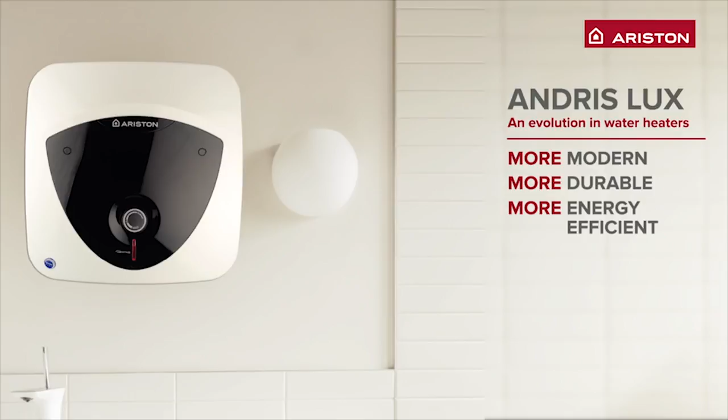The Andris Lux water heaters are of the unvented type, and this means that they are designed to be connected to a mains-fed water supply feeding hot water to one or more outlets. The majority of the range can be installed without a G3 qualification and are powered by a 13 amp outlet. No special taps are required, and the hot water produced is supplied at equal pressure to the mains water supply

to the water heater. The Andris Lux is available in either 10 or 15 litre oversink or undersink models, so it can be housed in a cupboard or at high level. We also offer a 30 litre variant, which is only available as an oversink model.

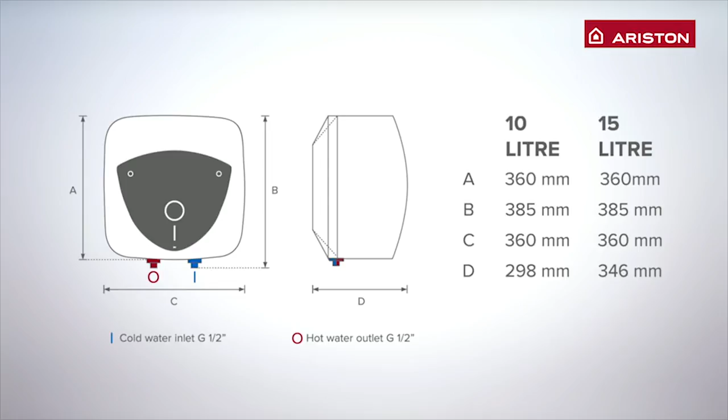The Andris Lux is small and compact, which means you can install it almost anywhere you need hot water. It features faster heat up times, improved performance, and a titanium enamelled tank for durability. We all need small amounts of hot water for washing and cleaning. Loft conversions, cloakrooms, utility rooms, small industrial units, cafes and building sites are just a few places where Ariston's Andris Lux electric water heaters have been installed.

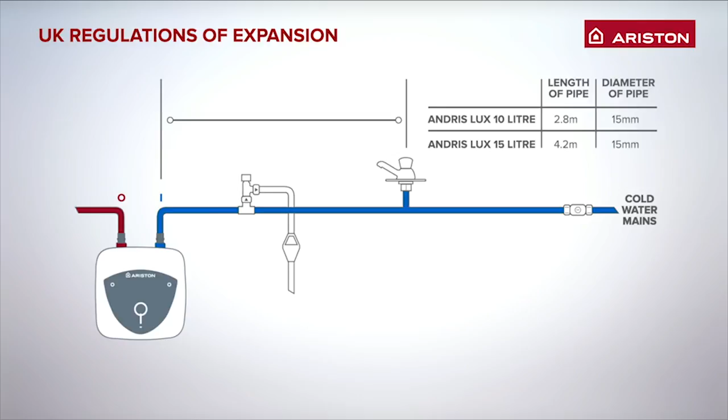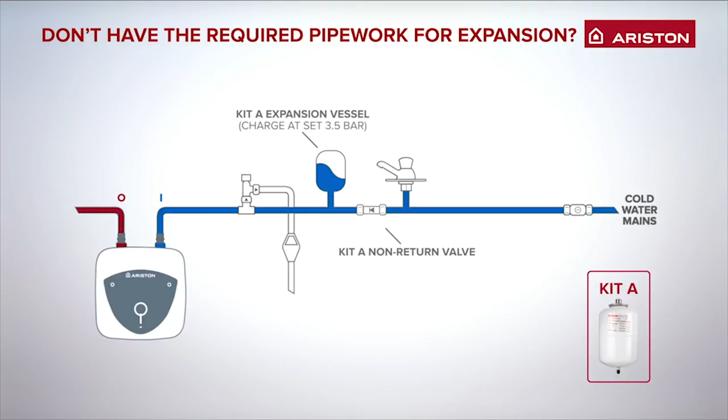So just how simple are they to install? UK regulations currently permit unvented water heaters with a capacity of up to 15 litres to accommodate expansion within the supplied pipework. However, this depends on the proximity of the water heater to the cold water draw-off. If the pipework between the cold water inlet on the heater and the cold tap on the sink is less than 2.8 metres, you will need to install an expansion vessel with a non-return valve, Kit A.

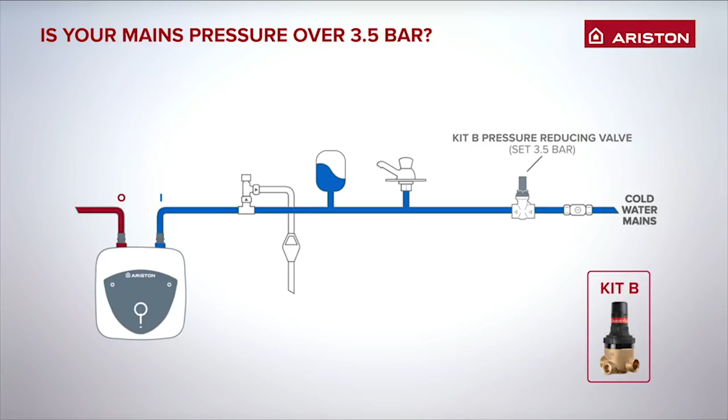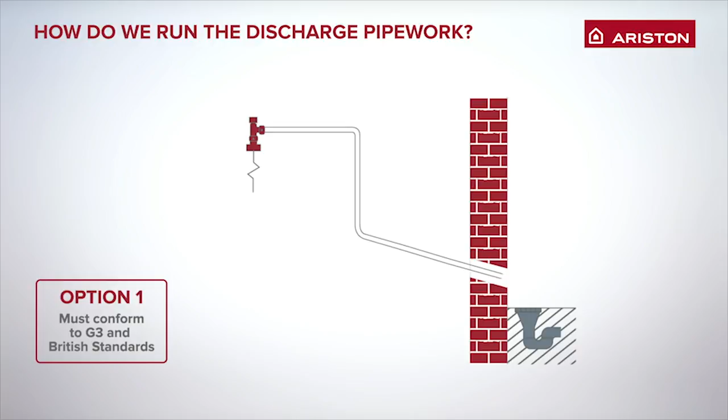If your mains inlet water pressure is more than 3.5 bar, you will need to install a pressure reducing valve, Kit B. If you're unsure about your water pressure, install the pressure reducing valve by default. The discharge pipe must be run through an exterior wall and terminate in a safe place such as a drain. If this is not possible, products do exist to allow you to feed into the house waste system.

If the discharge pipe, which gets rid of excess water pressure, is of an excessive length, you may need to install a tundish, Kit C. If you are unsure, call us and we'll advise you.

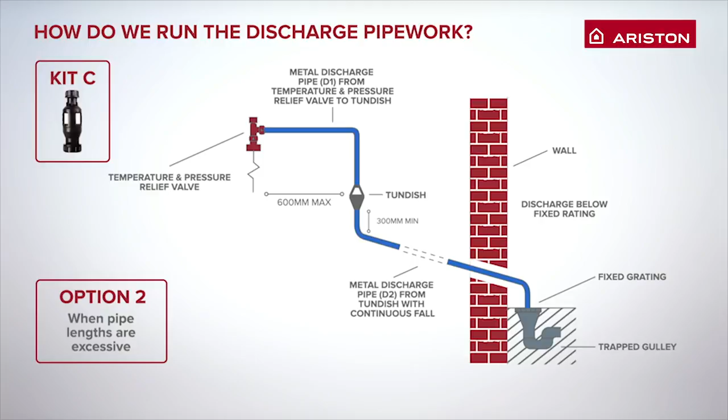First, check you have a convenient mains power and mains water supply. Make sure you've got the right tools for the job. A pencil, a drill, wall plugs, screws and drill bits, 15mm copper pipe cutters, spirit level, screwdriver set, wire cutters, an adjustable spanner and a tape measure.

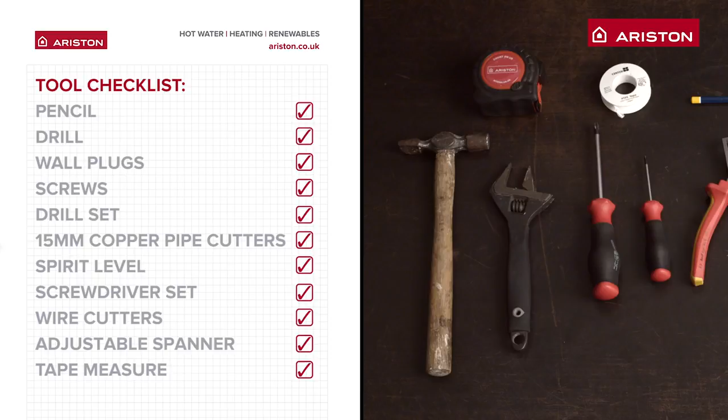Today we're going to install the undersink version to feed a garage sink, and because we only need small amounts of hot water, the 10 litre version is sufficient for our needs. The Andris Lux comes with an installation manual, a pressure relief valve, a mounting bracket and dielectric junctions. We're also going to install kits A and B to show you how they're done. Remember, you need to check which of these kits you'll need for your installation. Before you start, clear the area to give yourself as much room to work as you can.

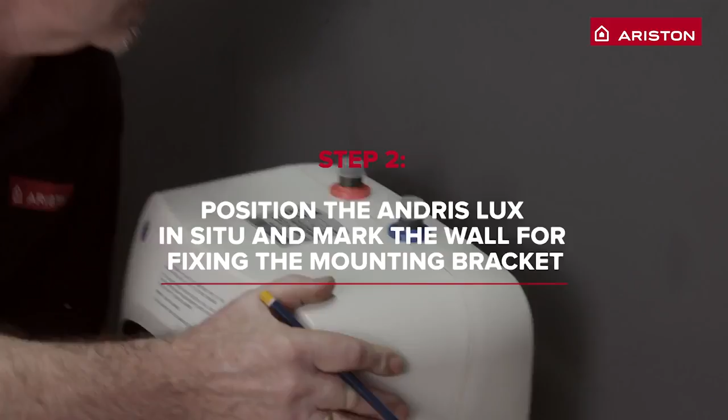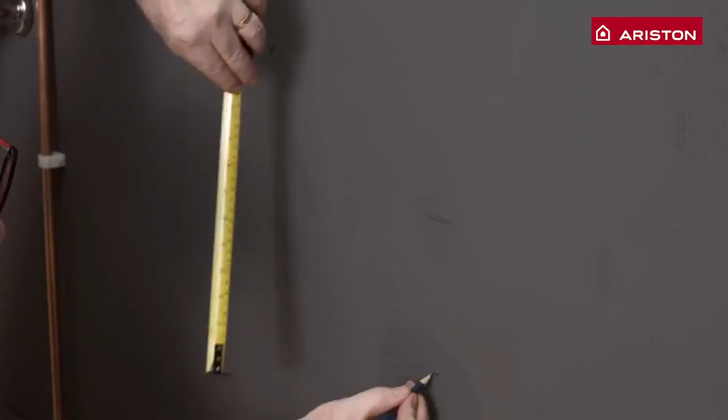First, mount the unit. It's really important to make sure the unit will fit nicely wherever you're planning to install it. Fix the mounting bracket 150mm below the top mark. How you affix the mounting bracket will depend on the material your wall is made of, but in any case, use a spirit level to make sure it's level.

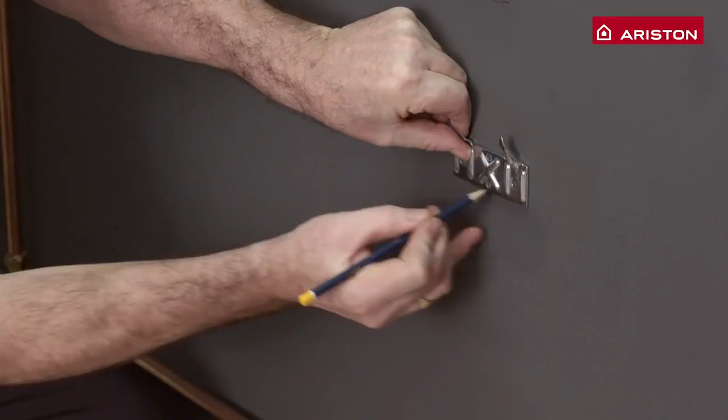Here, Derek is marking the holes ready for drilling, and we'll be using wall plugs and 30mm screws to ensure the mounting bracket is solid. Make holes in the wall using a drill and appropriate drill bit.

Once the mounting bracket is firmly attached, mount the Andris Lux by hooking the mounting bracket into the mount on the back of the unit and firmly push down, making sure it's stable. For this installation video, we're going to use a plastic push-fit system. The system uses a simple action, meaning that it is quick, clean and easy to use.

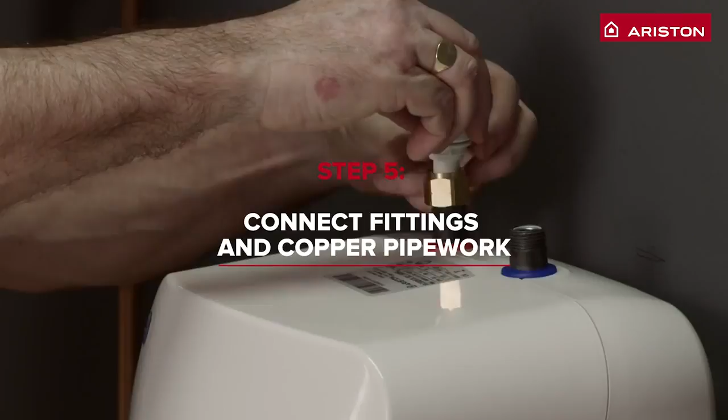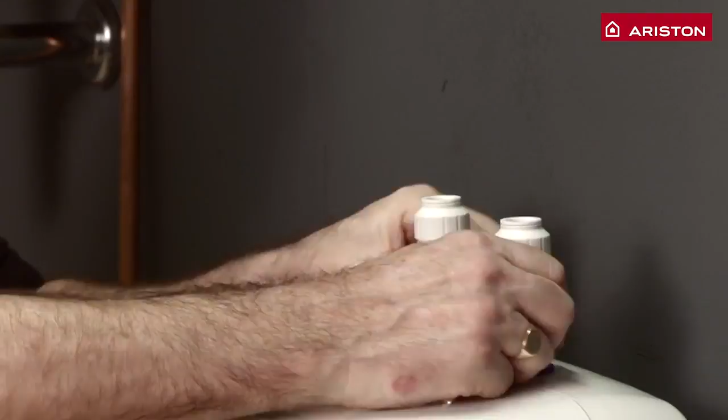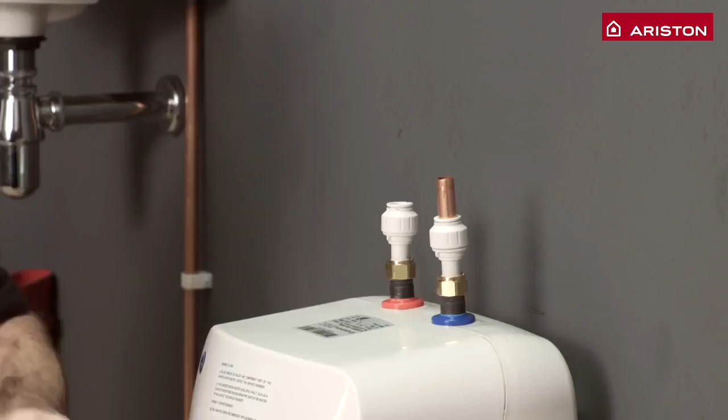Screw on flat face 15mm compression fittings to both the inlet and outlet terminals and tighten using an appropriate spanner. If you're using copper piping throughout, then fit the supplied dielectric junctions instead. To ensure the unit can safely deal with rapid temperature changes, you must have a minimum of 300 mm of copper pipe from the inlet and outlet terminals before going into the plastic pipe. Here we see Derek using a series of fittings to accomplish this.

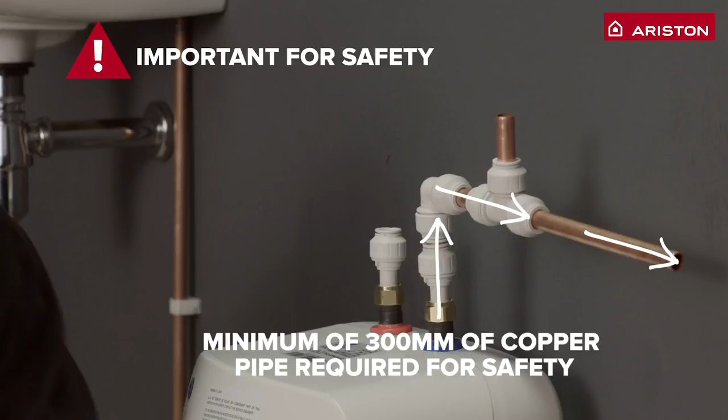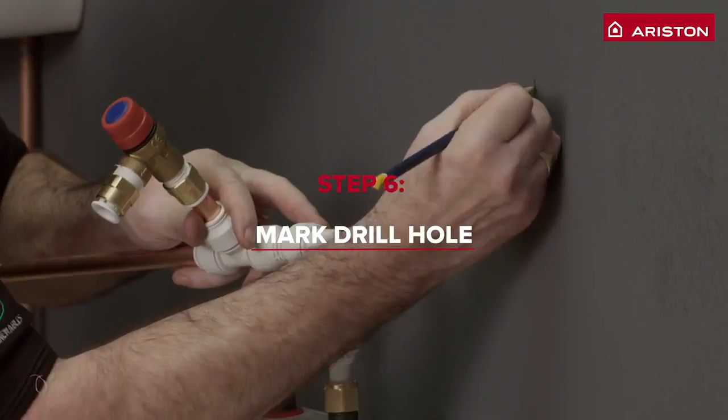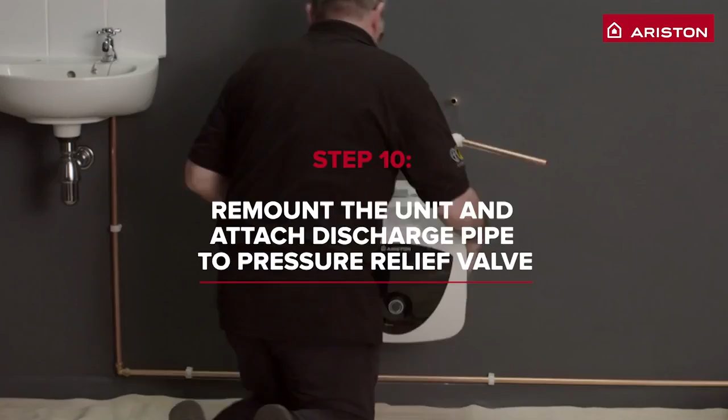He now takes the opportunity to mark out the positioning of the pressure relief valve. Mark the position of the hole for the discharge pipe with a pencil. Now take the Andris Lux off the mount and set it aside. This gives you more space to work and keeps the unit clean. Drill through the wall on the marked hole with an appropriate drill bit. Insert the copper discharge pipe into the hole. Mount the unit back on the wall and connect the discharge pipe to the pressure relief valve.

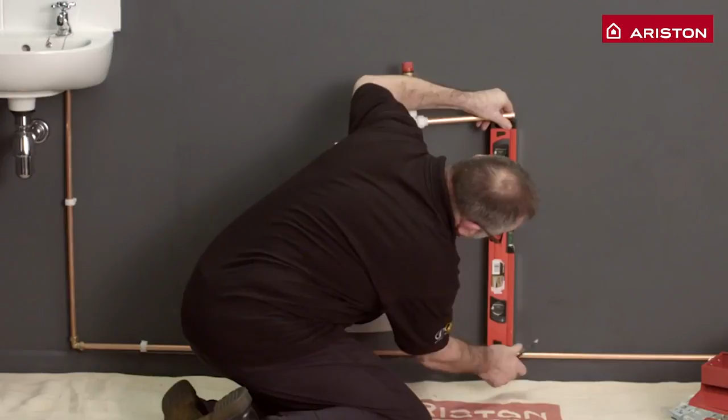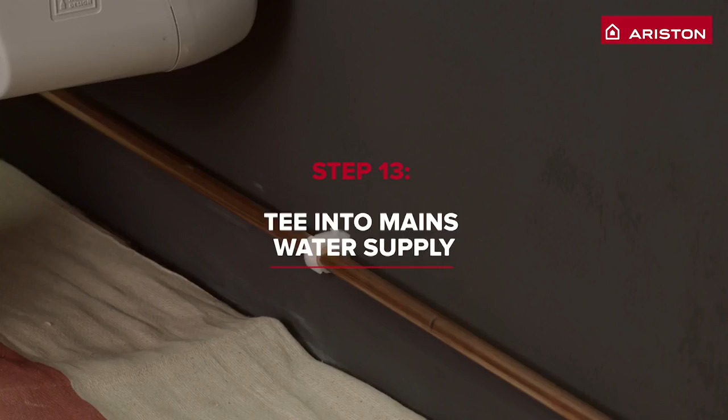In order to begin the plumbing of the unit, we must tee into the mains water supply. Derek marks out where he would like to tee into the pipework using the plastic tee as a guide. Turn off the mains water supply. The connection into the main supply is made via a 15 mm plastic tee fitting. In our case, our water pressure is over 3.5 bar, so we will be using Kit B, a pressure reducing valve. This is connected to the plastic pipework and tightened.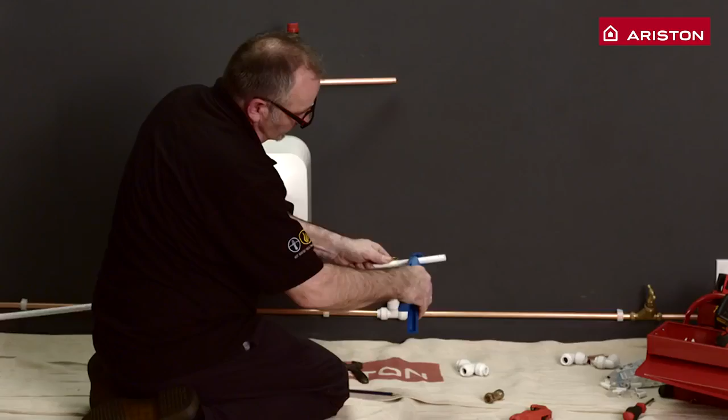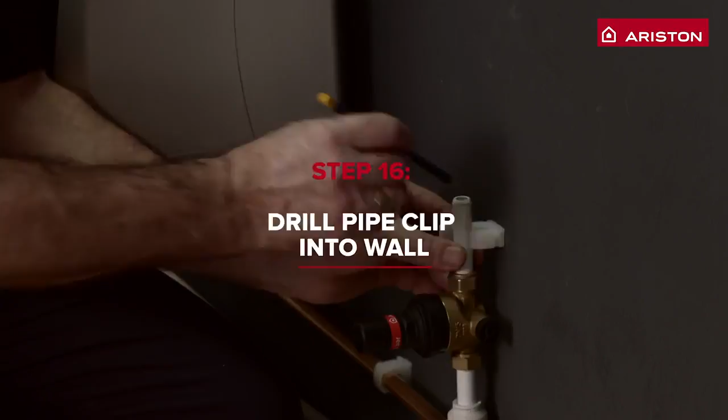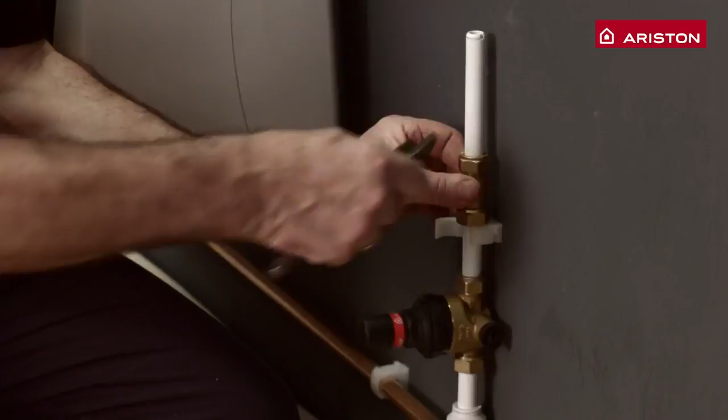As shown here, we want to ensure that the pipework is secure and have installed several pipe clips to keep everything in place. We will now install the non-return valve, which is part of Kit A. Derek now connects a plastic T fitting which will allow us to accommodate the expansion vessel later.

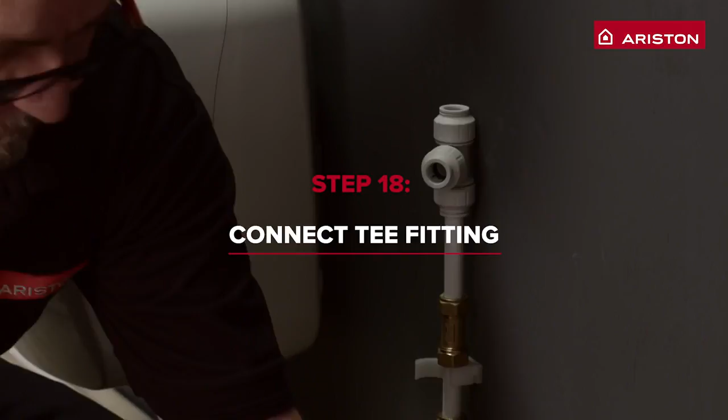From the top of the T connection, join up all of the pipework. From the T connection, using a short piece of pipe, connect the expansion vessel using a 15mm flat face connector.

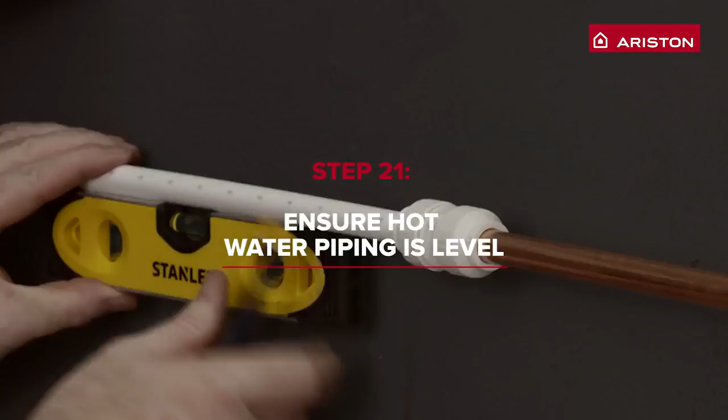Now we turn our attention to the hot outlet of the unit. As mentioned earlier, you must have a minimum of 300mm of copper pipe from the inlet and outlet terminals before going into the plastic pipe. Now run the plastic pipe directly to the hot water tap and secure. We've now completed our plumbing of the unit and can proceed to connect the electrical supply.

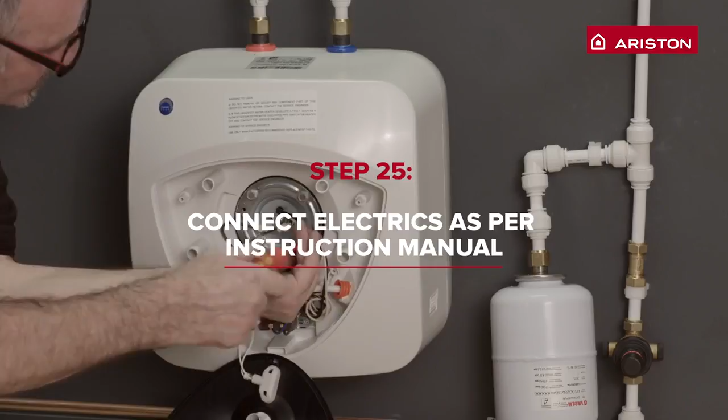You can access the electrical connections by removing the fascia panel. To do this, unscrew the two screws located behind the cosmetic caps. You should be making the connections as per the wiring instructions in the manual. In our case, we've got our electrical connection via a 13 amp fused spur.

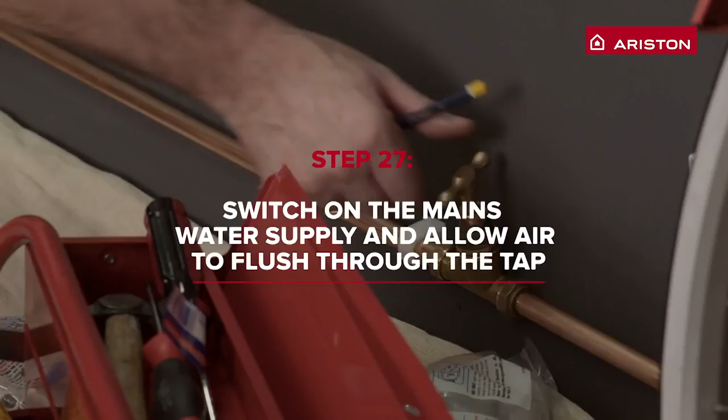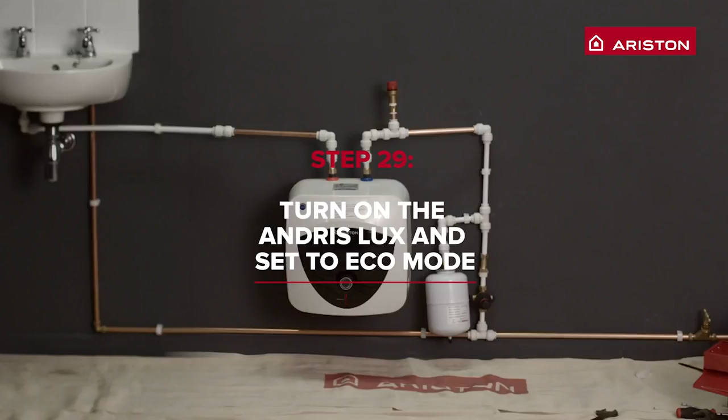Now we're ready to get the unit working and enjoy hot water. Turn on the mains water supply and allow the air to flush through the pipework. Check all the pipework at this stage to ensure there aren't any bad connections or leaks. Turn on the Andris Lux and set the dial to the E position to maximise economy and save energy. Once the red light has extinguished from the heating lamp, the water has reached the desired temperature. This will take about 15 minutes. Now open the hot tap and enjoy your hot water.